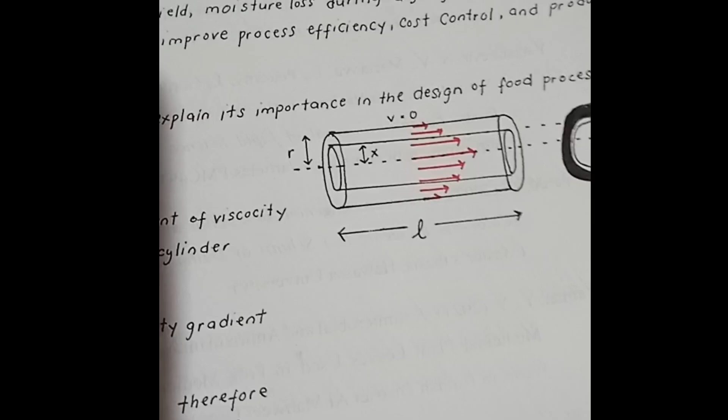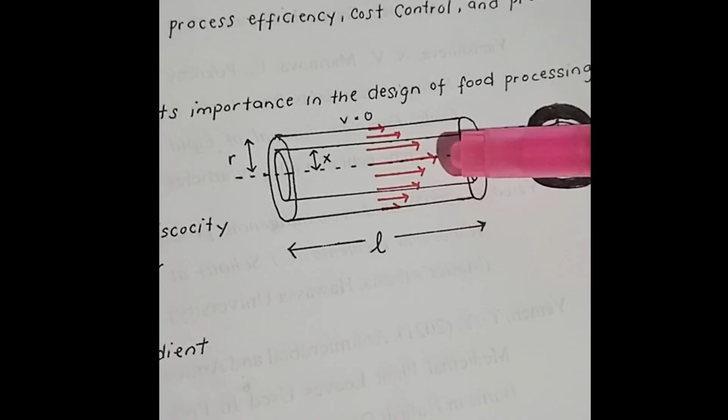Derive the Poiseuille equation and explain its importance in the design of food processing systems. So this is the free body diagram. Cylinder ni siya. And then sa center sa cylinder is from center to the surface muna siya ang iyang radius. Then ang velocity niya is 0 if duol siya sa surface. While magkaduol siya sa center, ang velocity pod niya is magkadako. Then muni ihang total length. So for front view, mao ni siya. Then muni iyang thickness, which is the dx.

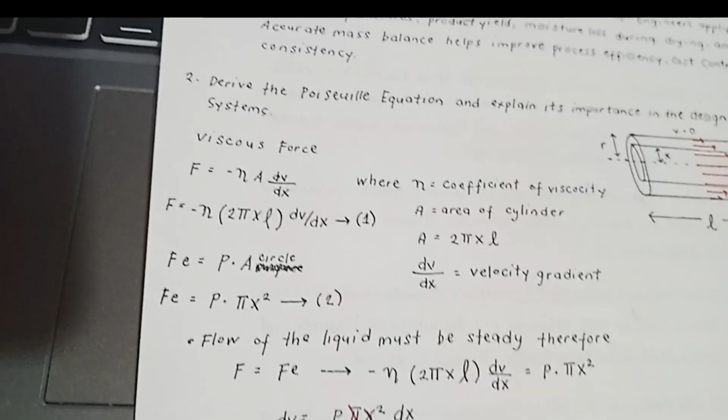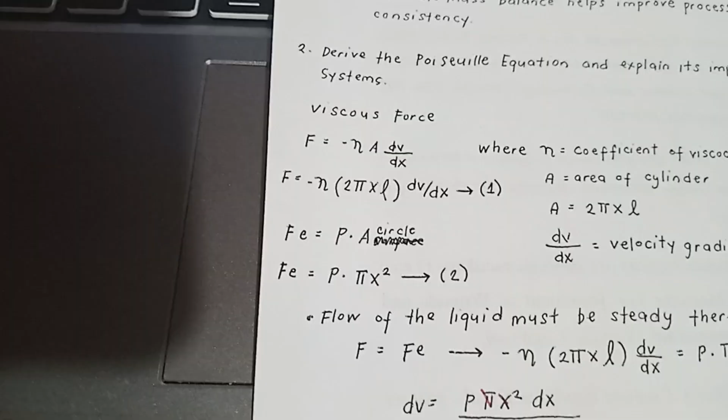So the first step in deriving the Poiseuille equation is to find the viscous force, which is F is equals to negative n A dV over dx, where n is the coefficient of viscosity, A is the area of the cylinder, where ang area niya is 2 pi xl, and dV over dx is muna siya ang velocity gradient. So by putting the value of the area, muna siya negative n times 2 pi xl times dV over dx. So next is the external force, which is ang formula niya is pressure times area of the circle. So ang gamito na to na area sa circle is pi x squared.

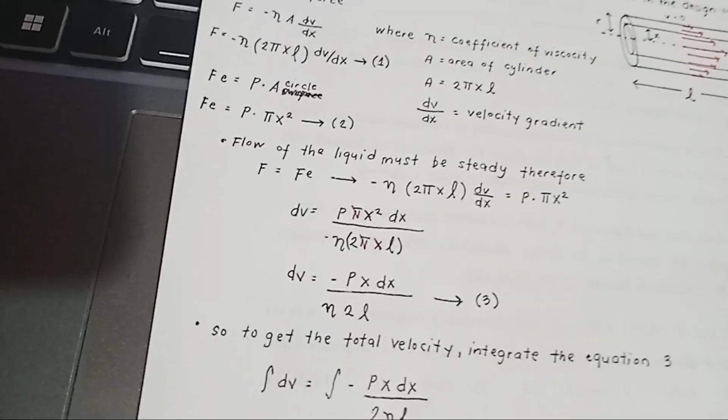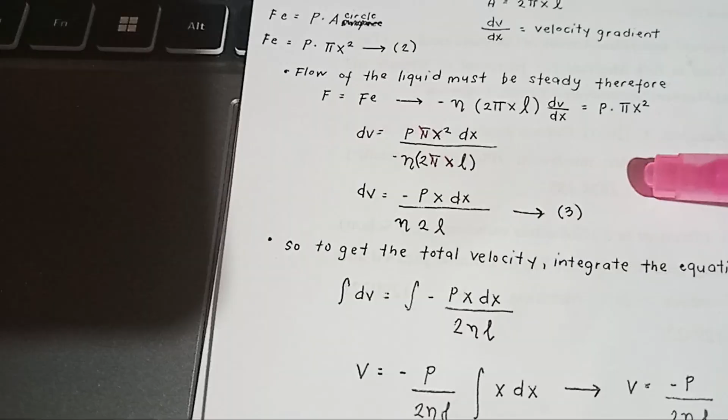So next step is flow of the liquid must be steady state. Therefore, para steady state siya, ang viscous force kay equal nato siya sa external force, which is negative n times 2 pi xl dV over dx is equals to P times pi x squared. Since dV man nato ang gipangita, then by rearranging the formula, himo siya P pi x squared dx over negative n times 2 pi xl. So makancel ang pi sa taas ug sa ubos, then ang x squared over x tayo mabilin na x. So ang final dV is equals to negative Px dx over 2nL. Muna siya ang equation number 3.

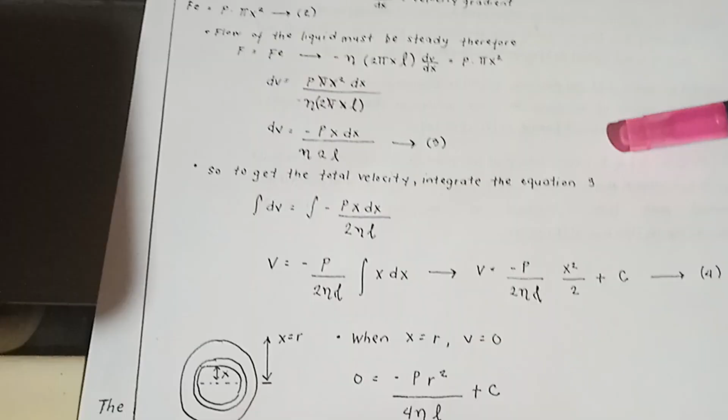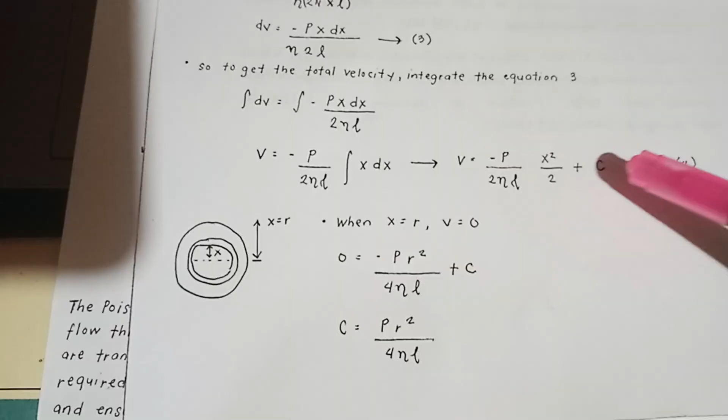So to get the total velocity, i-integrate nato ang equation number 3. So integration of dV is equals to integration of negative Px dx over 2nL. So by integrating ani nila, ang final is V is equals to negative P over 2nL times x squared over 2 plus C. Muna siya ang equation number 4. Next na to buhaton is pangitaon nato ang value sa C. So sa kato ang free body diagram na circle, sa surface sa circle, makita nato na x is equals to R and V is equals to 0.

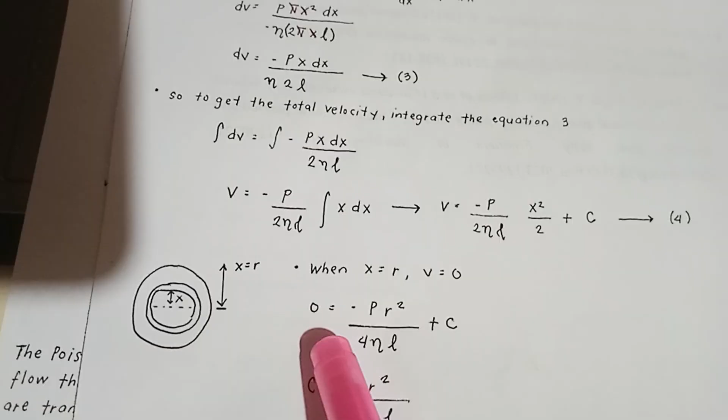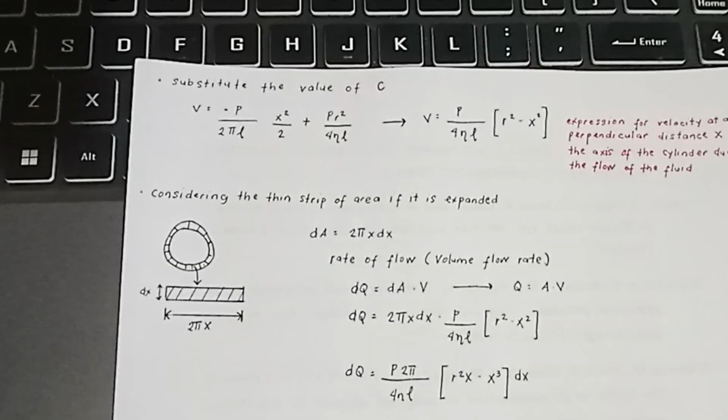So, from equation number 4, ma-rewrite na to siya as 0 is equals to negative PR squared over 4nL plus C. So, by rearranging the formula, since C atong pangitaon, mahimo na siya, C is equals to PR squared over 4nL. Since nakuha naman nato ang value sa C, then pwede nato siya ma-substitute sa equation number 4, which is V is equals to negative P over 2nL times x squared over 2 plus PR squared over 4nL. So, pag ato na siyang i-rearrange, V is equals to P over 4nL times R squared minus x squared. So, mao ni siya ang equation for velocity at a perpendicular distance x from the axis of the cylinder due to the flow of the fluid.

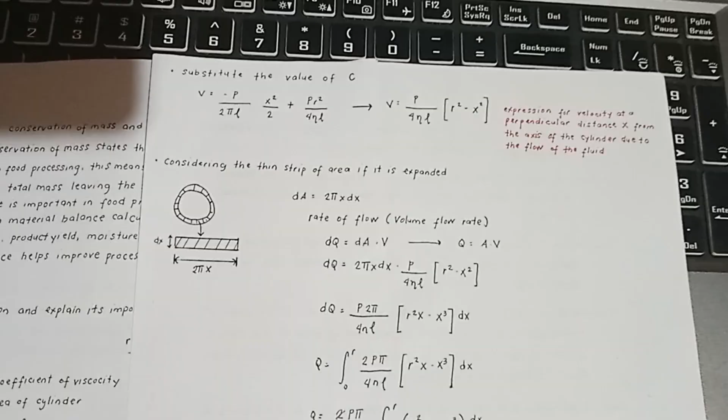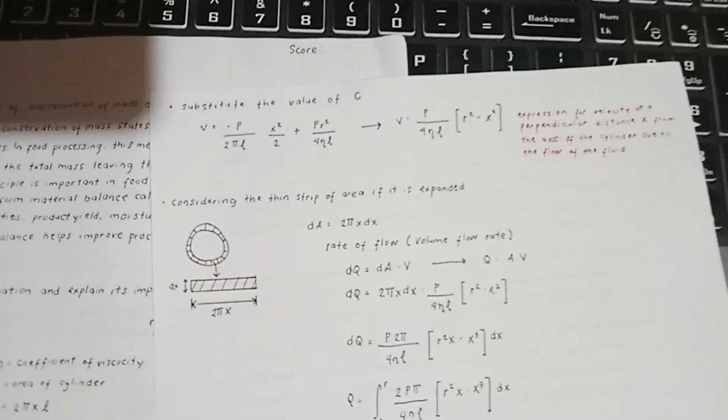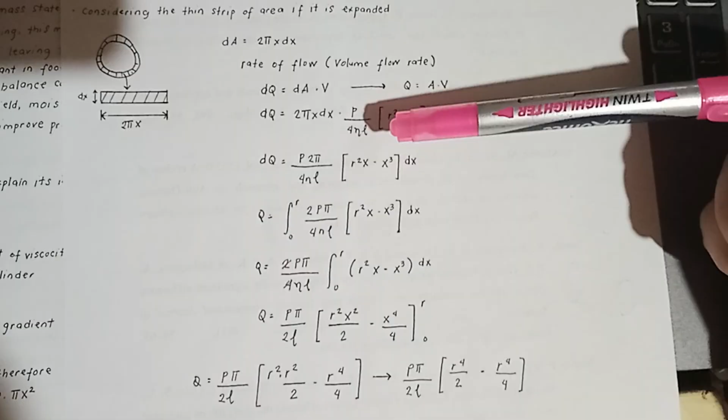Next step is considering the thin strip of area if it is expanded. So, from the free body diagram, sa katuang circle, ay sa atoang cylinder, sa front surface niya, mao ni ang iyahang thickness. Kani ang nai-hollow. Then, pag magkuha tag thin strip ana, like ato siyang i-rectangular, iyang thickness mao ni ang dx, then iyang length kay 2 pi x. So, by formula, dA is equals to 2 pi x dx. Using the rate of flow or volume flow rate na formula, which is dQ is equals to dA times V, then ang dA is equals to 2 pi x dx. Then ang V is P over 4nL times R squared minus x squared.

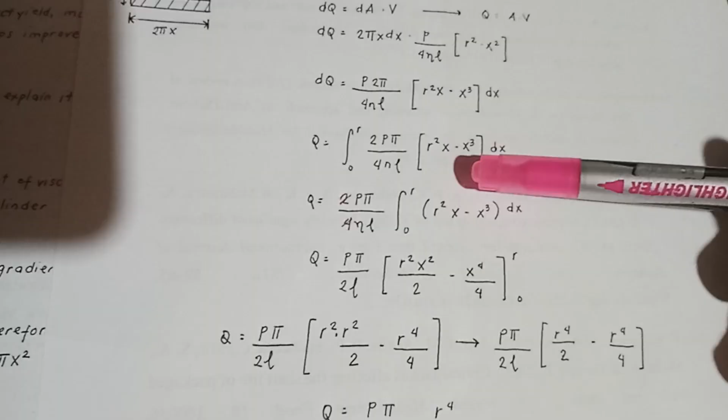Then by rearranging dayon sa formula, mao na ni siya, dQ is equals to P 2 pi over 4nL times R squared x minus x cubed dx. Para makuha na ang Q, ato na siyang i-integrate, which is magbutang lang ta og upper og lower limit, which is ang upper limit nato kay R, then ang lower limit nato kay 0. Ipagawas nato ang iyahang whole number, which is 2P pi over 4nL, then integration of R squared x minus x cubed dx with a lower limit of 0 tapos upper limit na R.

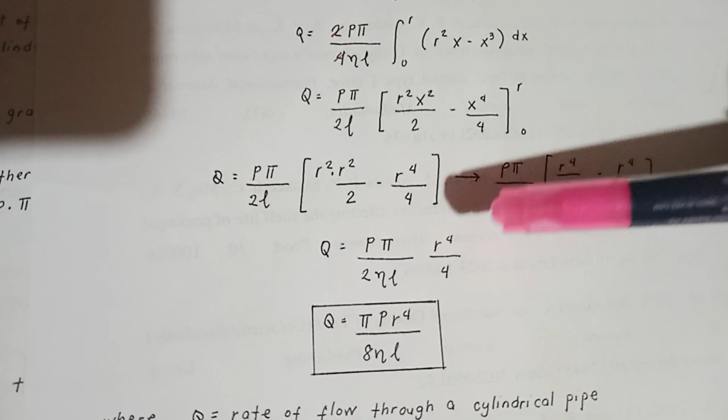Kung ano dayon ni, imuhang ipuli ang x into R. Then Q is equals to P pi over 2nL times R squared times R squared over 2 minus R to the 4 over 4. Or, mao ni siya P pi over 2nL times R to the 4 over 2 minus R to the 4 over 4.

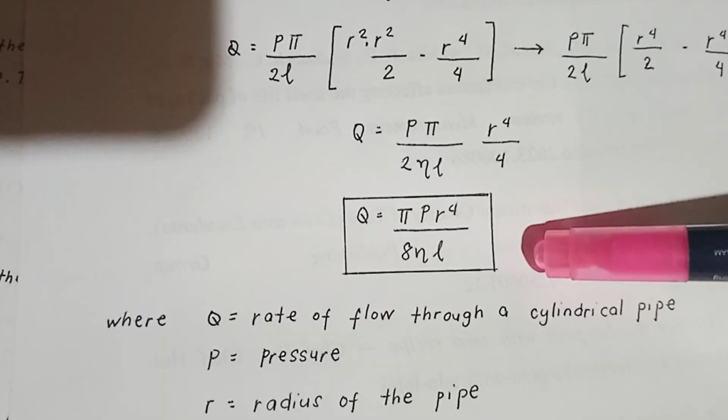So muna ni ang final na Poiseuille equation, which is Q equals πPR⁴ over 8ηL, where Q is the rate of flow through a cylindrical pipe, P is the pressure, R is the radius of the pipe, η is the coefficient of viscosity, and L is the length of the cylinder.

The Poiseuille equation is important in the design of food processing systems because it explains how liquids flow through pipes under smooth or laminar conditions. Many food products such as milk, juice, and oil are transported through pipelines. So understanding their flow is essential. This will also determine the required pressure, proper pipe size, and suitable pump selection. It also helps reduce energy loss and ensures smooth flow, which protects product quality and supports hygienic operation.

Question number 3. Discuss the difference between Newtonian and non-Newtonian fluids with examples from food system. Newtonian fluids have a constant viscosity, meaning the resistance to flow does not change with applied force or shear rate. Examples in food system include water, milk, and vegetable oil.

On the other hand, non-Newtonian fluid kay mag-usab ang viscosity depende sa shear or force applied. Daghan nga food products ang na-fall ani na category like ketchup, yogurt, honey, chocolate, o starch solution. For example, ketchup becomes thinner when shaken or squeezed, showing shear thinning behavior.

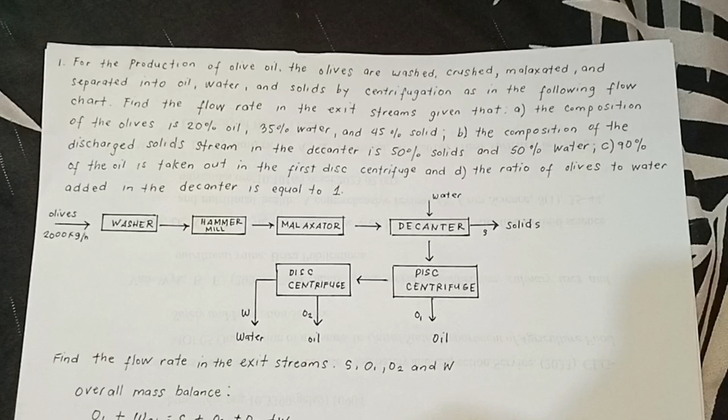Problem number 1. For the production of olive oil, the olives are washed, crushed, malaxated, and separated into oil, water, and solid by centrifugation, as in the following flow chart. Find the flow rate in the exit streams given that the composition of olives is 20% oil, 35% water, and 45% solid. The composition of the discharge solid stream in the decanter is 50% solids and 50% water.

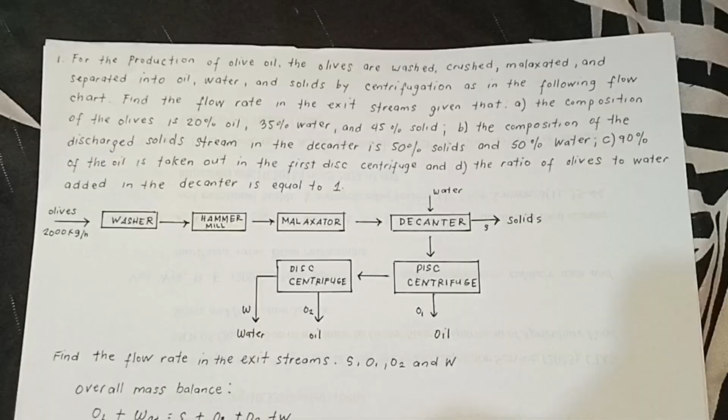90% of the oil is taken out in the first disc centrifuge, and the ratio of the olives to water added in the decanter is equal to 1. The solution follows the process and nag-apply siya og simple mass balance idea. First, the olives enter the system at 2,000 kg per hour. And nag-contain siya og oil, water, and solids.

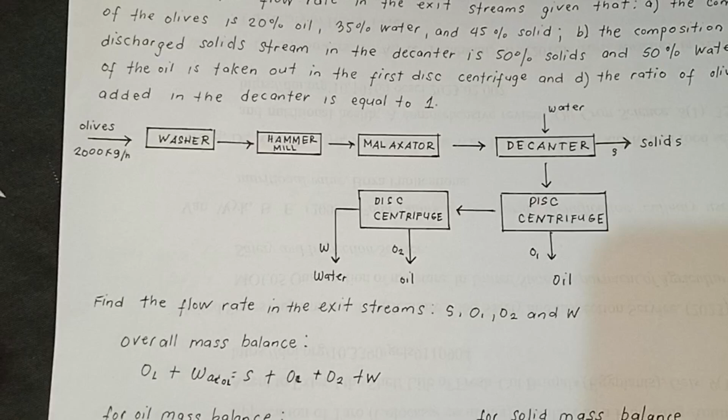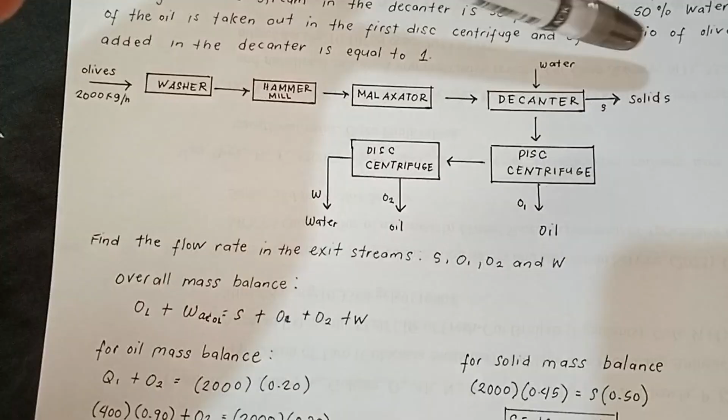The washer, hammer, and malaxation steps only prepare the olives and don't remove any materials. So the amount of oil, water, and solids remain unchanged up to the decanter. The decanter produces a solid and liquid streams. All the solids from the olives leave in the solid stream, so mag-leave siya sa solid stream. And this stream contains 50% solid and 50% water with no oil, because the total amount of solid in the olive is known. The flow rate of the solid stream can be found directly using a mass balance.

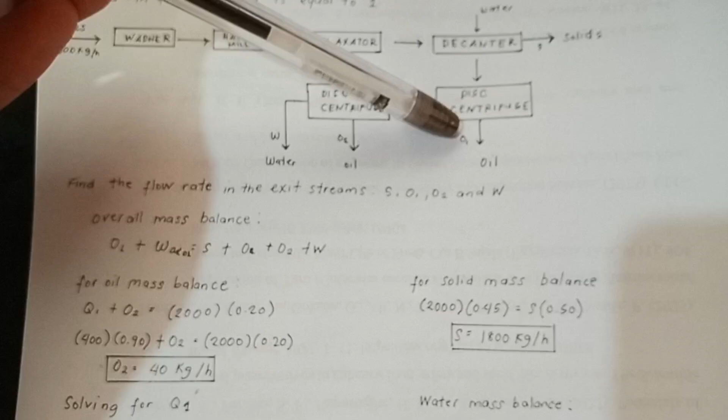So, first step in calculating this problem is pangitaon na to ang flow rate in the exit stream, which is ang kaning solid, ang oil 1, ang oil 2, and ang water.

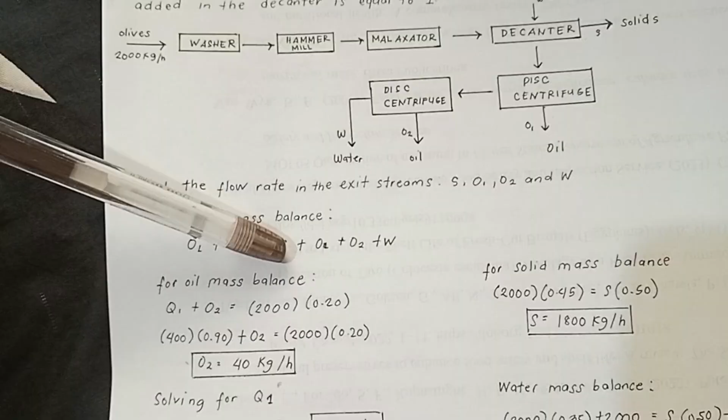So, overall mass balance formula is olives plus water in olives is equals to solid plus oil 1 plus oil 2 plus water. So, ang diri ana part is mo ni siya ang iyahang mga naasa mga outflow kibali kani.

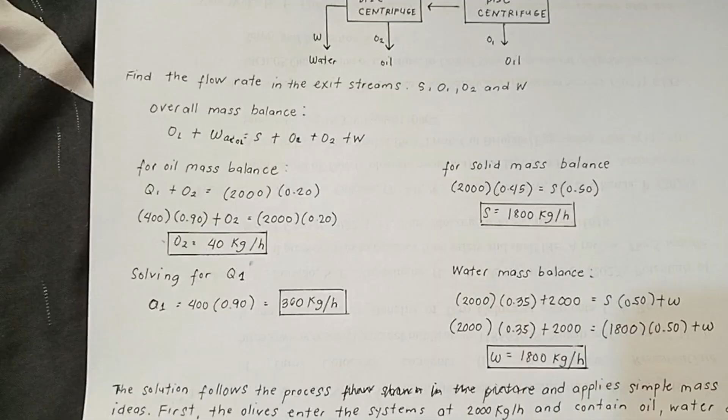So, for mass balance, O1 plus O2 is equals to 2,000 times 0.20. So ang O1 nato is 400 times 0.90. Nahimo na siya og 400, it's because ang olive na 2,000 kg per hour, gitimesan siya og 20%. So equals to 400 times sa 90% dayon na.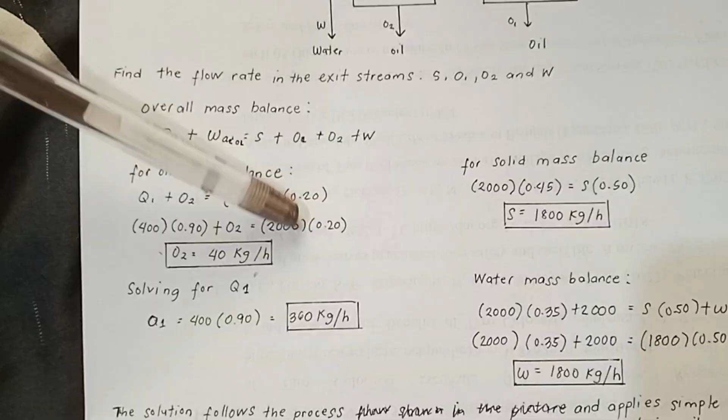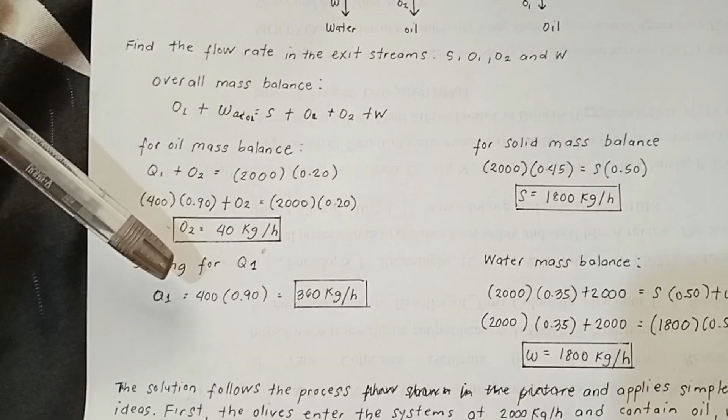Oil that taken out in the first disc centrifuge plus O2 is equals to 2,000 times 0.20. Ang 0.20 kay mo gyapon na siya ang sa percent sa oil. So ang O2 nato is equals to 40 kg per hour. So solving for Q1, ang Q1 nato kay 400 times 0.90 is equals to 360 kg per hour.

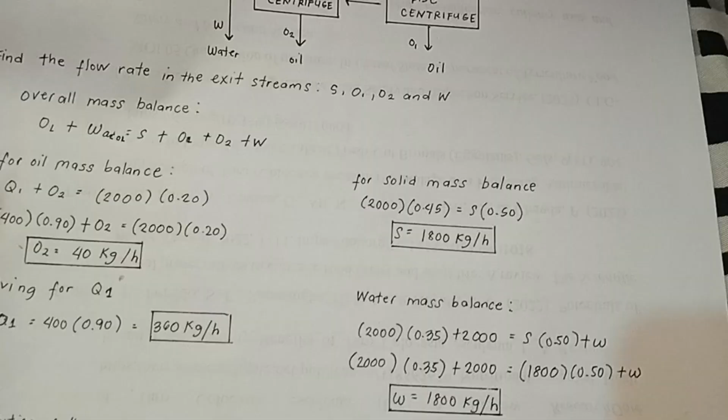For the solid mass balance, 2000 times 0.45 is equals to S times 0.50. Since times na to siya og 0.50, kaya nag-ingon man siya na the composition of the discharge solid stream in the decanter is 50% solid. So ang S kay 1,800 kg per hour.

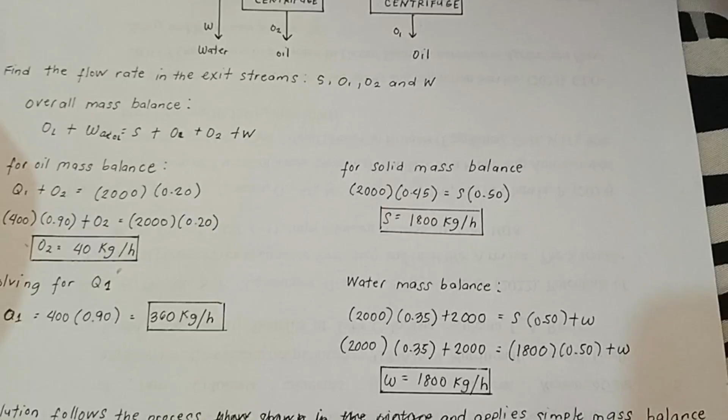So next is the water mass balance. 2,000 times 0.35 plus 2,000 is equals to S times 0.50 plus the water. So upon calculation, makakuha ta sa value sa water is equals to 1,800 kg per hour.

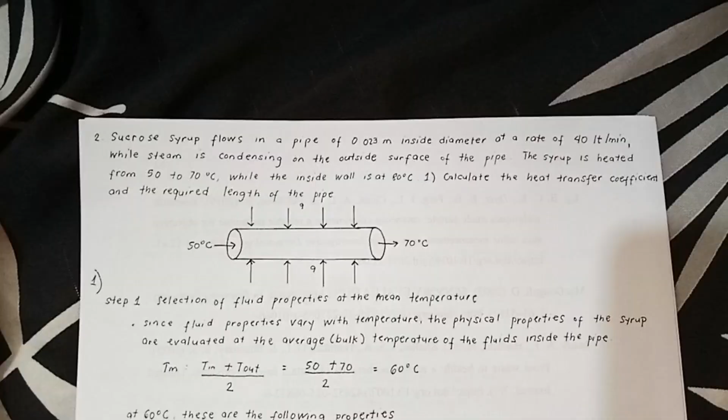Problem number 2. Sucrose syrup flows in a pipe of 0.023 meter inside diameter at a rate of 40 liters per minute, while steam is condensing on the outside surface of the pipe. The syrup is heated from 50 to 70 degrees Celsius, while the inside wall is at 80 degrees Celsius. So calculate the heat transfer coefficient and the required length of the pipe.

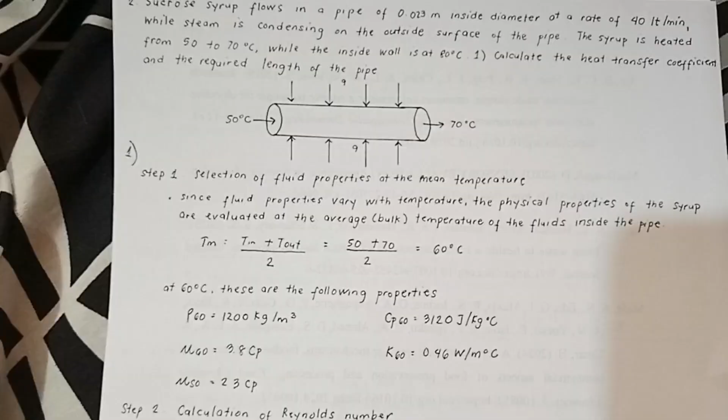So here are the process in calculating the heat transfer coefficient. Ang first step nato nabuhaton is selection of fluid properties at the mean temperature. Since ang fluid properties kay mag-vary siya with temperature, the physical properties of the syrup ma-evaluate siya at average or bulk temperature of the fluid inside the pipe.

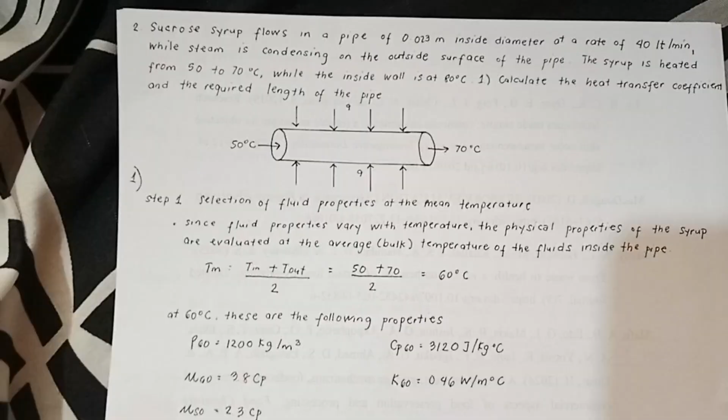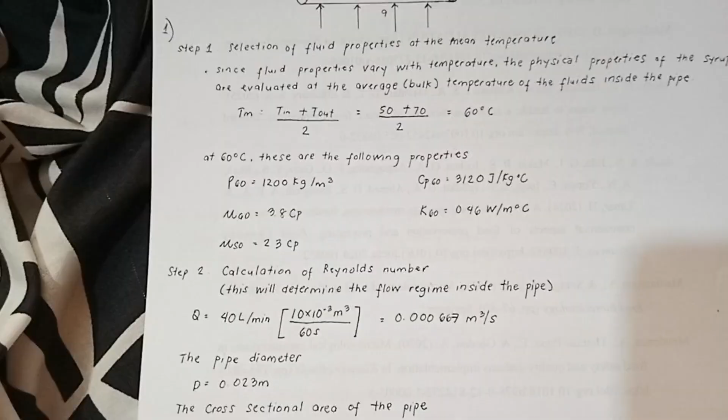So by formula, T in plus T out over 2, or 50 plus 70 over 2, is equals to 60 degrees Celsius. Since ang atong average temperature is 60 degrees Celsius, and from the properties of sucrose syrup at 60 degrees Celsius, iyang density is 1,200 kg per meter cube. Then iyang mu60 is equals to 3.8 Cp, 2.3 Cp, and iyang CP60 is equals to 3120 joule per kilogram degrees Celsius. Ang iyang K60 is equals to 0.46 watts per meter degree Celsius.

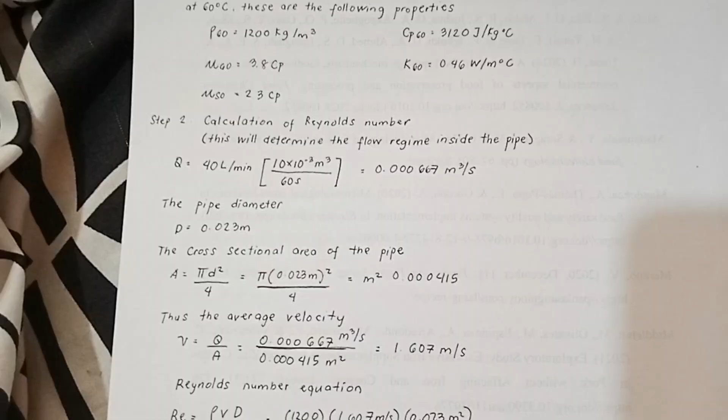So the second step na atong buhaton is to calculate the Reynolds number, diri nato mahibal-an ang flow regime inside the pipe. And calculating the Reynolds number, first kuhaon nato ang discharge, which is 40 liters per minute. Given na siya, then i-convert lang nato siya into meter cube per second. Ang magawasan na niya is 0.000667 meter cube per second. Then sunod is ang pipe sa diameter, which is 0.023.

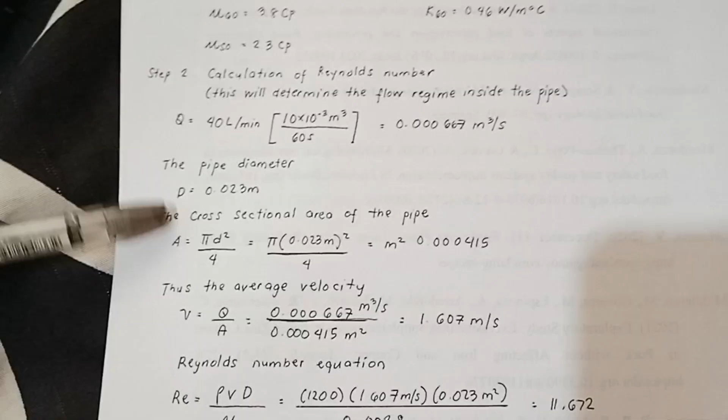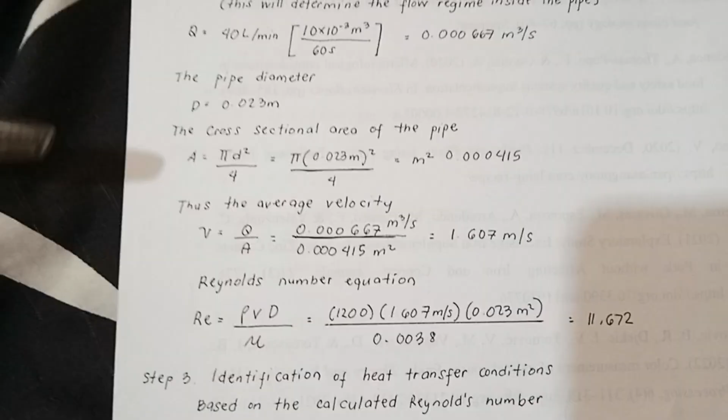Next, kuhaon nato ang iyang cross-sectional area of the pipe. Ang area nato na gamiton is pi d squared over 4. So ang answer, 0.000415 meters squared. Sunod is average velocity, which ang formula gyud ana is discharge is equals to velocity times area. So by rearranging the formula, V is equals to Q over A. So nakuha man nato ang discharge na 0.000667 meter cube per second over ang area na 0.000415. So ato ang velocity is 1.607 meter per second.

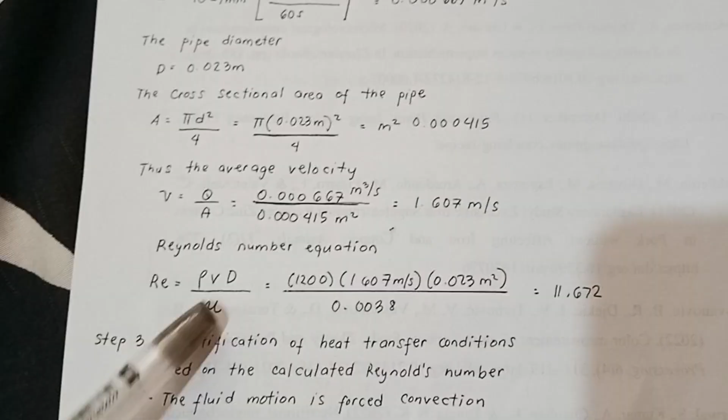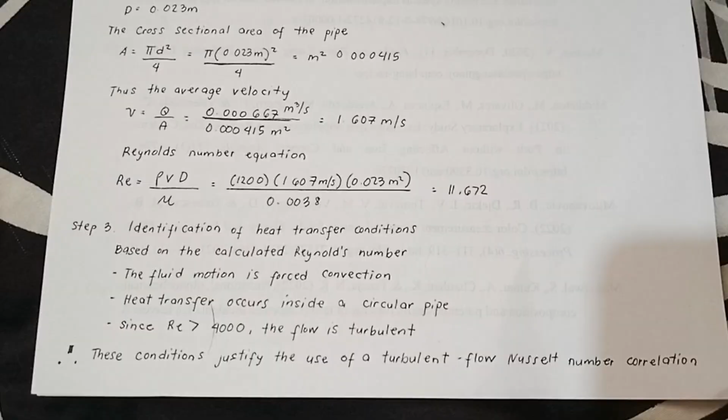So ang atong Reynolds number by formula, rho v d over mu. Ipasak ang mga value, mo ni siya ang mugawas: 11,672. So ang step 3 is mag-identify ta og mga heat transfer condition. Based on the calculated Reynolds number, the fluid motion is forced convection. Next, ang heat transfer nag-occur siya sa sulod sa circular pipe. Since ang Reynolds number is greater than 4,000, di ba ang Reynolds number kay 11,672 man, therefore the flow is turbulent. So these conditions justify the use of turbulent flow Nusselt number correlation.

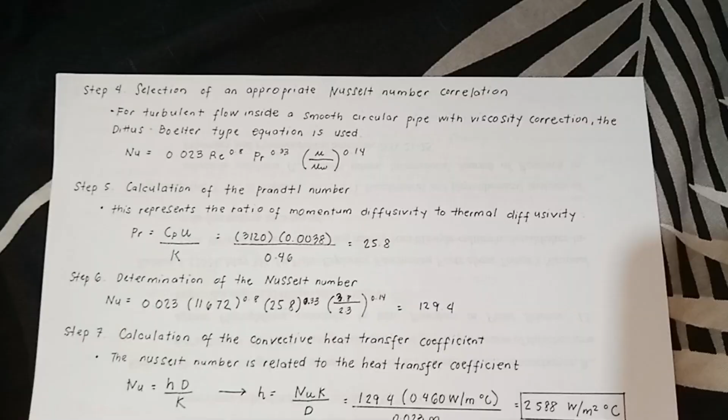Kung step 4, mag-select na dayon ka og appropriate Nusselt number correlation. So for turbulent flow inside a smooth circular pipe with viscosity correction, the Dittus-Boelter type equation is used. So muni ang formula na gigamit.

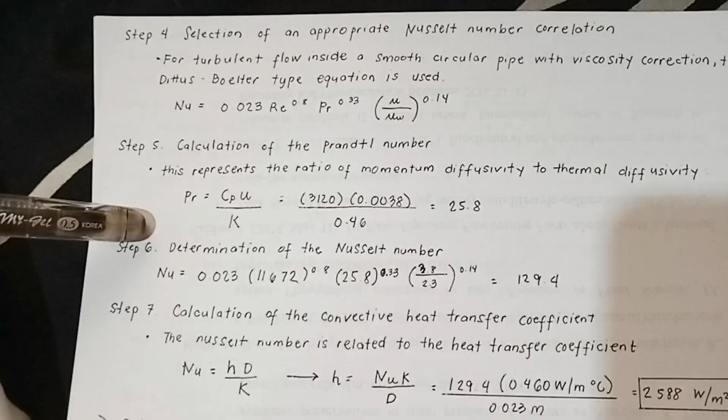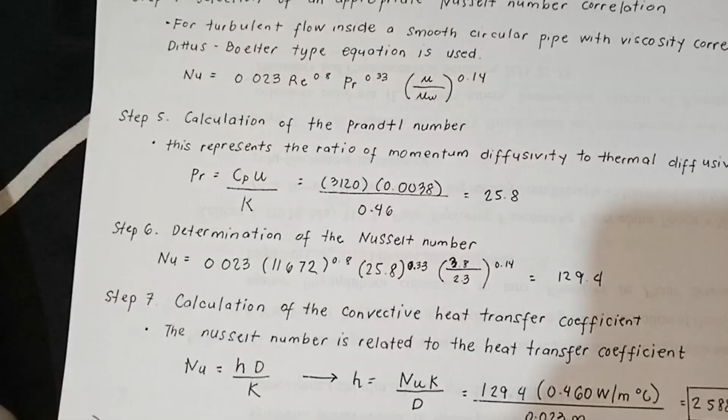Next nato, our fifth step is i-calculate nato ang Prandtl number. This represents the ratio of the momentum diffusivity to thermal diffusivity. Muni ang iyahang formula. PR is equals to Cp times mu over K, is equals to 3120 times 0.0038 over 0.46, is equals to 25.8.

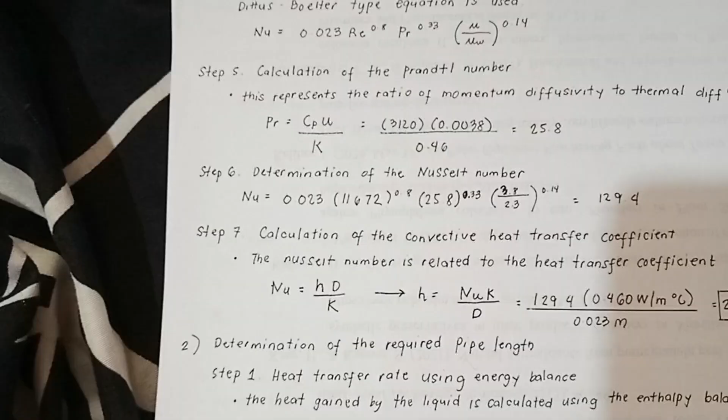So ang next step nato, which is step 6, is magdetermine ta og Nusselt number. So by formula sa Nusselt, 0.023 times 11,672 to the power of 0.8, times 25.8 to the power of 0.33, times 3.8 over 2.3 to the power of 0.14, is equals to 129.4.

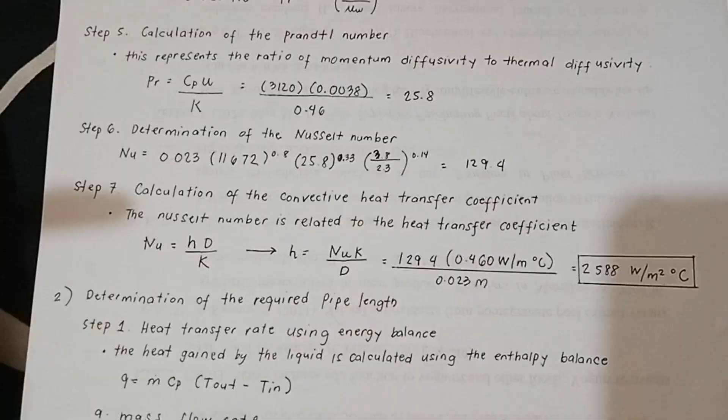So ang step 7 nato is mag-calculate na ta sa convective heat transfer coefficient. The Nusselt number is related to the heat transfer coefficient. So mo ni siya ang formula sa Nusselt number, Nu is equals to H d over K. Since kanimang H atong gipangita, which is the heat transfer coefficient, by rearranging the formula, ang H nato kay equals to 2,588 watts per meter squared degrees Celsius.

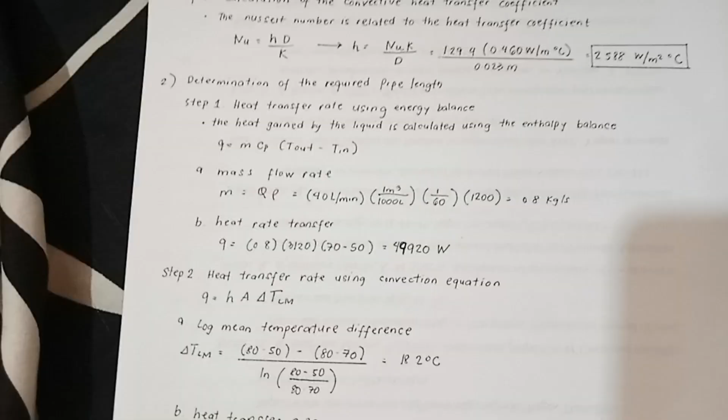Ang next nato na i-determine is ang length sa pipe. So ang step 1 nato na buhaton is heat transfer rate using energy balance. The heat gained by the liquid is calculated using the enthalpy balance, which is enthalpy is equals to mCp times T out minus T in.

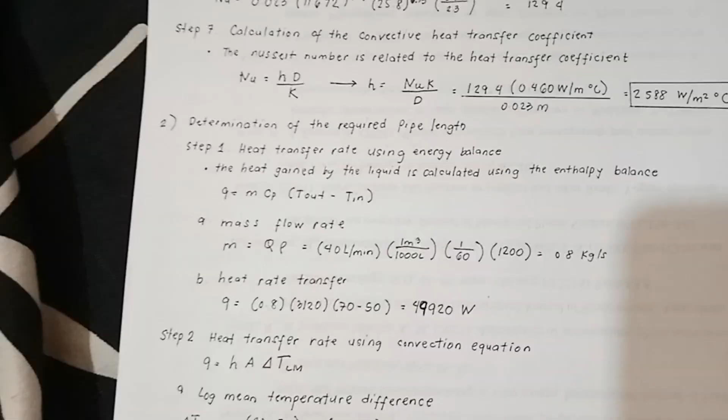Nato buhaton is mag-calculate ta og mass flow rate. So ang formula niya is discharge times the density. So ang answer niya is 0.8 kg per second.

Next is kuha na to ang iyang heat rate transfer, which is Q is equals to 0.8 times 3120 times 70 minus 50 is equals to 49,920 watts. So ang step 2 is...

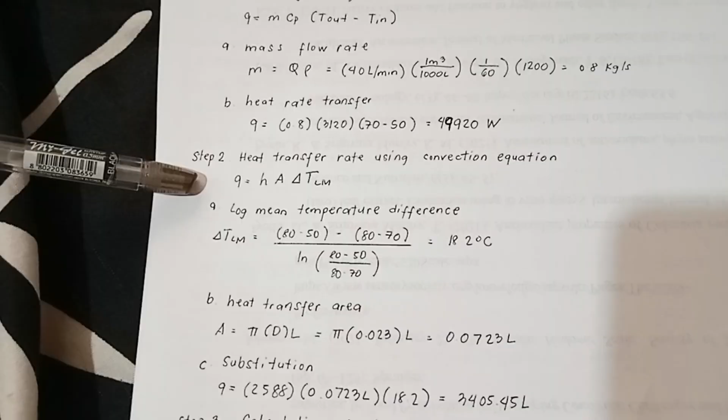I-calculate nato ang heat transfer rate using convective equation. So mo ni ang equation, Q is equals to H times area times ang ihang log mean temperature difference.

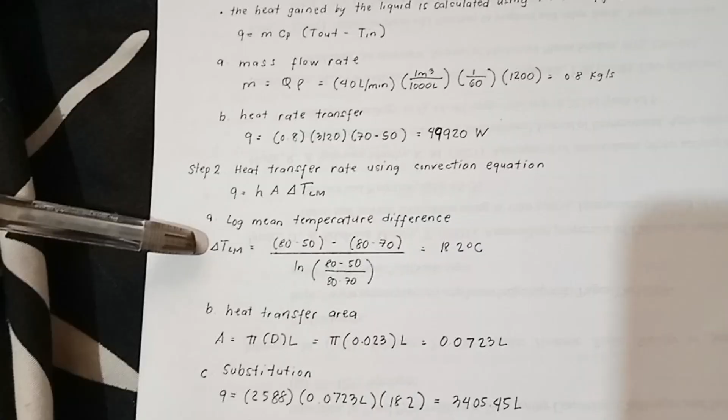So first, i-calculate sa nato ang log mean temperature difference, which is 80 minus 50 minus the quantity of 80 minus 70 over ln of 80 minus 50 over 80 minus 70, ang answer na niya is 18.2 degrees Celsius. Next na to i-calculate is ang heat transfer area.

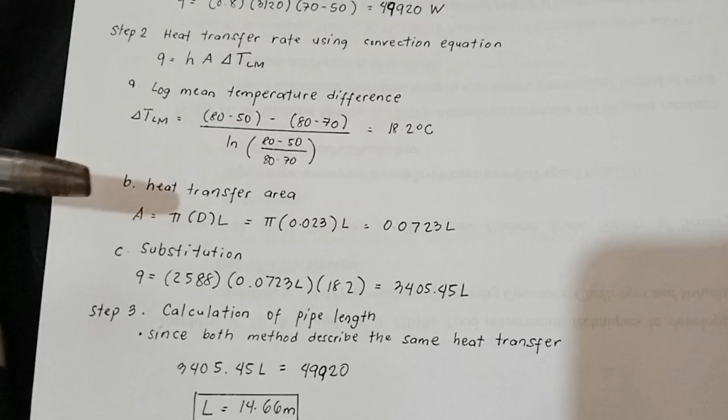So ang area na to na gamiton is pi d L. Since given man ang diameter, then unknown ang length, so ang answer sa area is 0.0723 length.

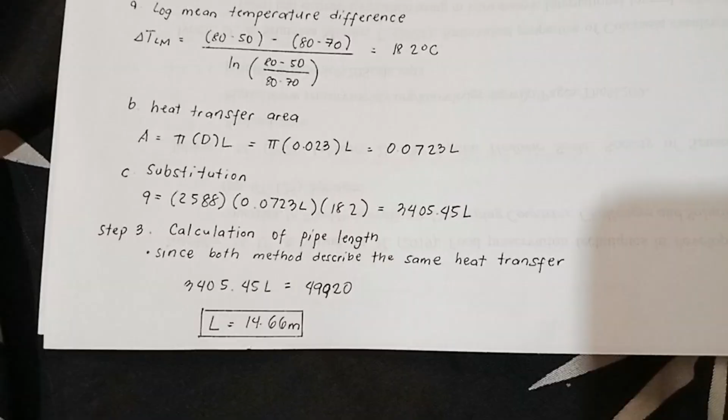So upon substitution, Q is equals to 2588 times 0.0723 L, mo ni siyang area, times 18.2 is equals to 3,405.45 L. So last step nato na buhaton, which is ang step 3, is to calculate the pipe length.

Since both method describes the same heat transfer, so ang 3,405.45 times length is equal siya sa 49,920. So, upon calculation, makuha nato na ang length is equals to 14.66 meter.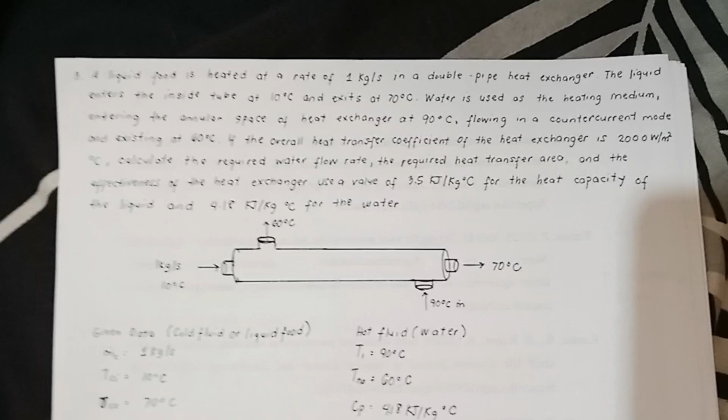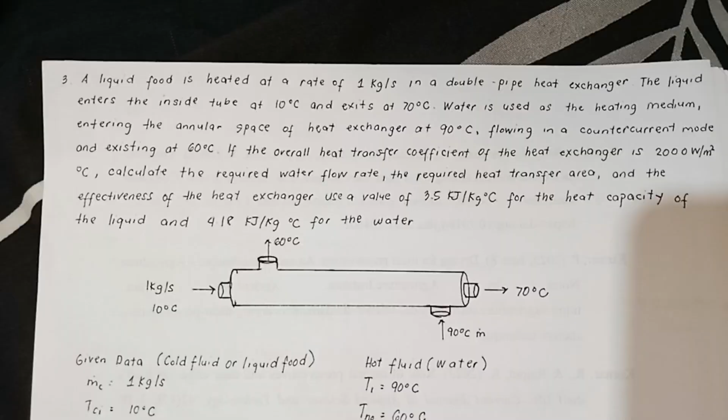Problem number 3. A liquid food is heated at a rate of 1 kilogram per second in a double pipe heat exchanger. The liquid enters the inside tube at 10 degrees Celsius and exits at 70 degrees Celsius. Water is used as the heating medium, entering the annular space of the heat exchanger at 90 degrees Celsius, flowing in a counter current mode and exiting at 60 degrees Celsius. If the overall heat transfer coefficient of the heat exchanger is 2,000 watts per meter squared degrees Celsius, calculate the required water flow rate, the required heat transfer area, and the effectiveness of the heat exchanger.

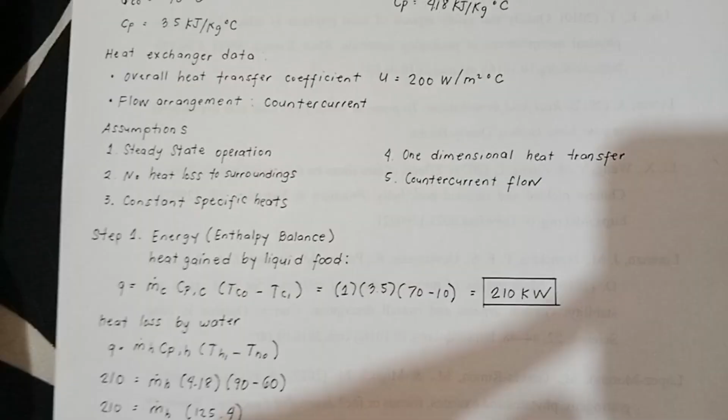Use a value of 3.5 kilojoule per kilogram degrees Celsius for the heat capacity of the liquid and 4.18 kilojoule per kilogram degrees Celsius for the water. So ato ang assumption: 1 is steady state operation, 2 is no heat loss to surroundings, 3 constant specific heat, 4 one-dimensional heat transfer, 5 is counter current flow.

So step 1 nato is mag-calculate og energy or enthalpy balance. Heat gained by liquid food, Q is equals to m times CP times T outside minus T inside na cold, which is ang value niya is 210 kilowatts.

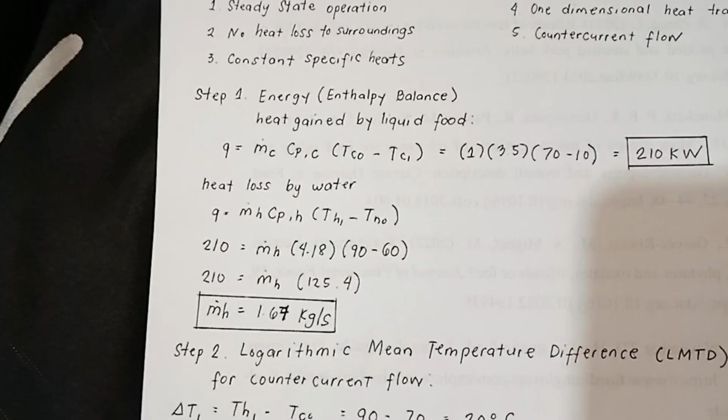Next, i-calculate na to ang heat loss by water or the required water flow rate. Q is equals to mass flow rate na hot times CP na hot fluids times T inside minus T outside na hot fluid. So, i-calculate.

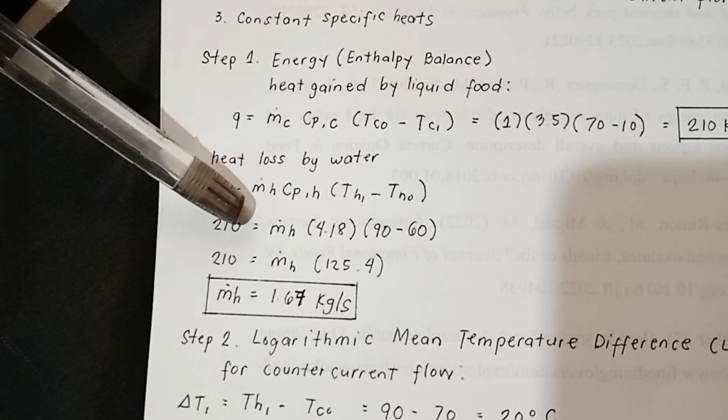So, ipansak na to ang mga value. Given man ni siya, given pod ang CP o ang temperature kay given pod. Ang unknown is ang mass, ang kaning mass flow rate sa hot fluids or ang water flow rate. So, mo ni siya ang upon solving ang kuan niya, ang water flow rate is 1.67 kilograms per second.

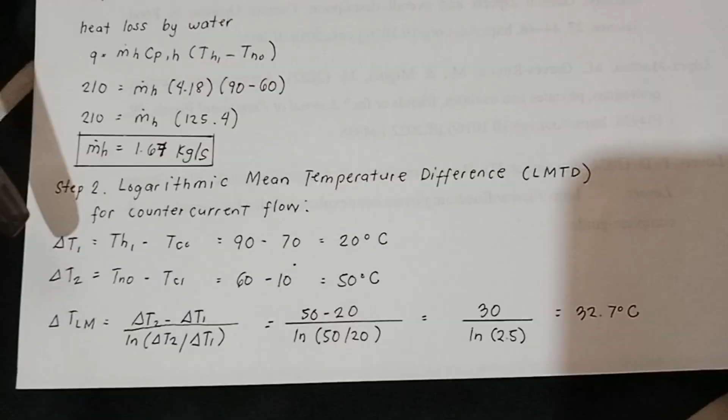So step 2 is i-calculate nato yung logarithmic mean temperature difference for counter current flow. So temperature difference sa T1, temperature sa hot fluid minus temperature sa cold fluid na out, is equals to 90 minus 70 is equals to 20 degrees Celsius.

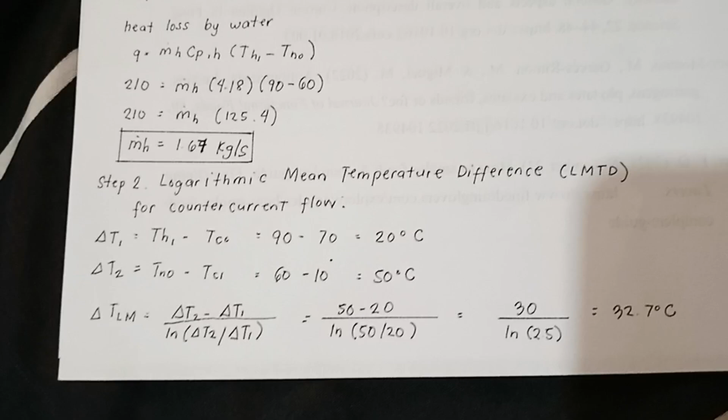Tapos temperature difference sa T2 is equals to temperature sa hot fluid na outlet minus temperature sa cold fluid na inlet, is equals to 60 minus 10 is equals to 50 degrees Celsius. So, by formula sa logarithmic mean temperature difference, change in temperature T2 minus change in temperature T1 over ln of change in temperature T2 over change in temperature T1. So, ang value na makuha nato is 32.7 degree Celsius.

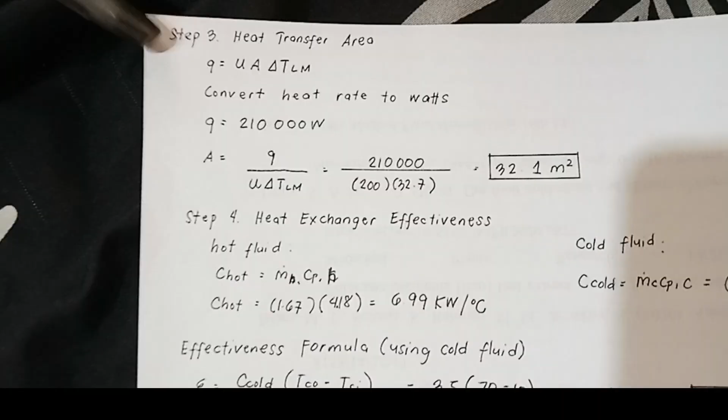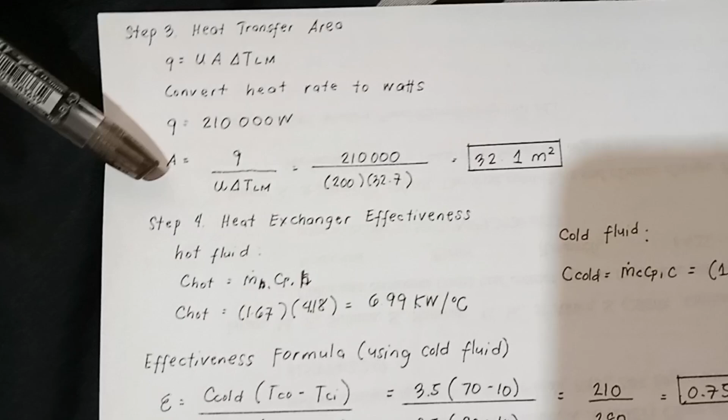So, ang step 3 is ato yung calculate ang heat transfer area, which is ang formula niya is Q is equals to U times area times ang log mean temperature na nasolve nato gaina. I-convert nato ang heat rate to watts, which is ang Q is equals to 210,000 watts na siya. So, area man nato ang gipangita, upon rearranging the formula na gikan ani, makuha nato ang heat transfer area na 32.1 meter squared.

So, ang step 4 nato na buhaton is, i-calculate nato ang heat exchanger effectiveness. For hot fluids, ang heat exchanger effectiveness sa C hot is equals to 6.99 kilowatts per degree Celsius. For cold fluids, 3.5 kilowatts per degree Celsius, or mo na siya ayang C minimum.

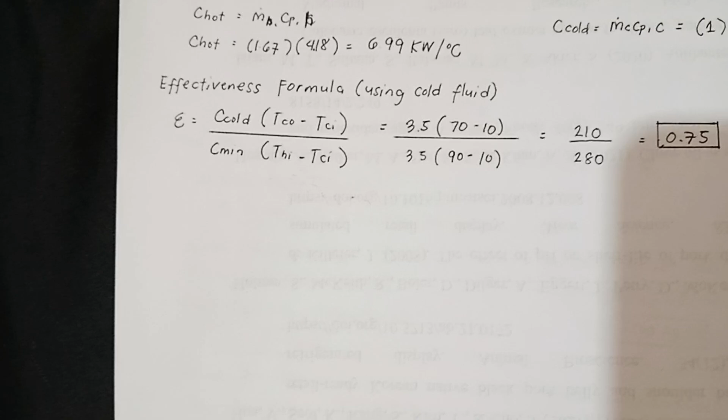So, the effectiveness formula using cold fluid, muna ni siya ang effectiveness formula, mag-solve na ta. E is equals, by formula, E is equals to C cold times T CO minus TCI over C minimum times T HI minus TCI. So, ipansak na to ang value mo ni siya. Then, ang mga results sa effectiveness formula using cold fluid is 0.75.